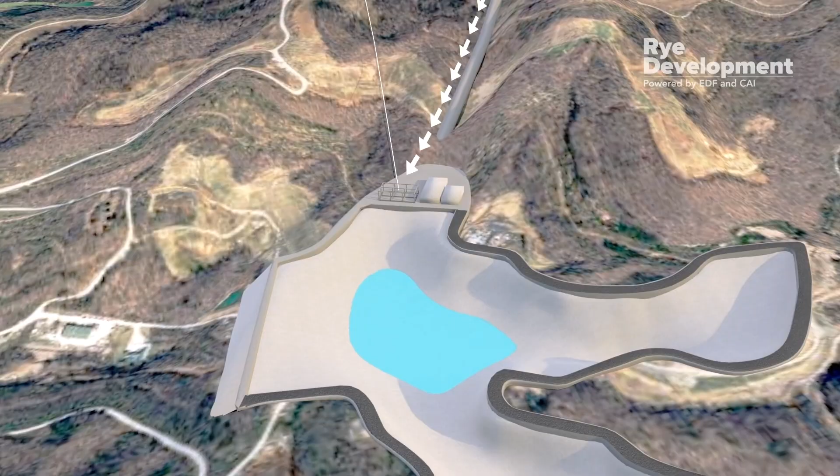It consists of two reservoirs at different elevations. When demand for electricity is low, energy is used to pump water from the lower reservoir to the upper reservoir. Then, when demand for electricity is high, water is released from the upper reservoir through a big pipe or a penstock. As the water flows downhill, it spins hydroelectric turbines at the bottom of the penstock to generate on-demand electricity. The water returns to the lower reservoir where the process starts again.

Pump storage projects are built to last. The first one, built in the U.S. more than 100 years ago, is still in operation today.

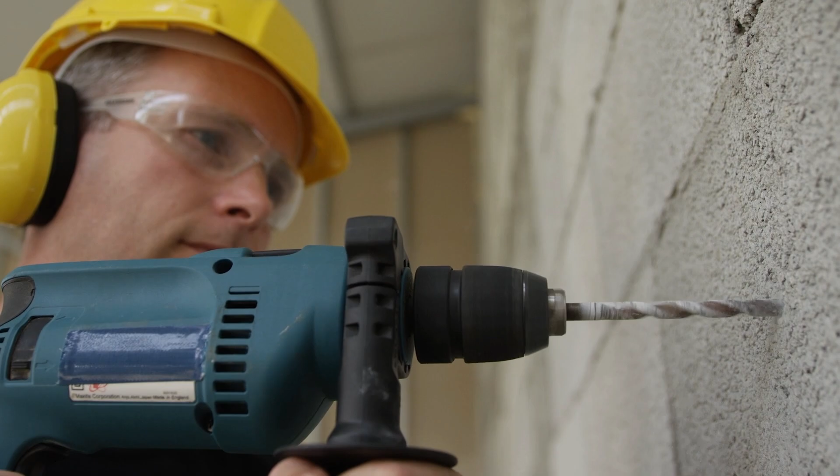Set in Bell County, Kentucky, the Lewis Ridge project represents a new era of jobs and economic growth for southeastern Kentucky. The $1.3 billion energy storage project will bring decades of positive economic benefits to the region. The project will generate more than 2,300 jobs during construction and deliver millions in tax revenue to Bell County once completed. Eastern Kentucky has a strong mining legacy.

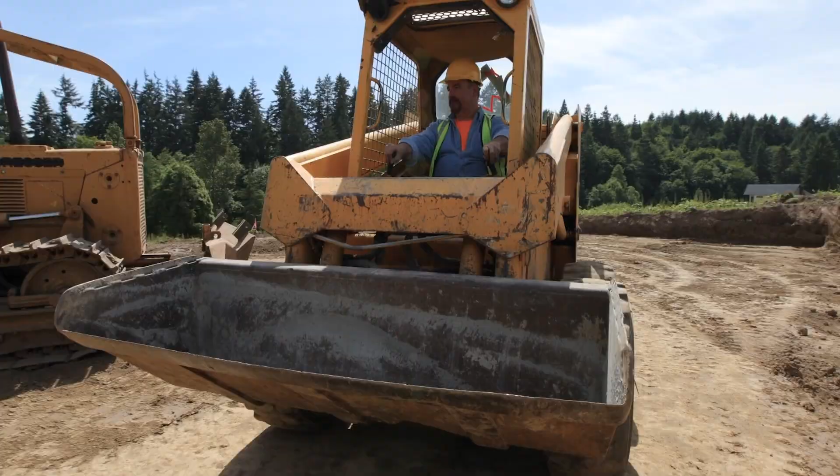Many of the same skills used in mining will be required to build the Lewis Ridge project. We will need workers with skills like operating heavy equipment, drilling, blasting, surveying, and project management.

Asher Land has owned this property 70, 80 years. It's historically been used for coal mining and timber harvesting. Most of the coal has been mined. This project by Rye Development of pump storage would be a great reuse of that property.

The Lewis Ridge project is not only an investment in the electrical grid, but it's a significant investment in Kentucky's future.

Good morning, I'm Bree Wilson, Vice President of Development at Rye Development. And I'm Sandy Slayton, Vice President Environmental at Rye Development. We're here to talk about pump storage, and more specifically, the project that we're developing in Bell County, Kentucky.

We have a slide presentation that's going to start here, but I'll tell you a little bit about Rye Development.

Rye Development is focused on leading us into the next generation of pump storage hydro. We're paving the way - we haven't built a pump storage project in over 30 years in the United States. They are being built internationally, and they're very important in the grid. But this is looking to be the first pump storage project in the U.S., and Kentucky's really leading the way. It's been really great working with folks in Kentucky, and they see that vision.

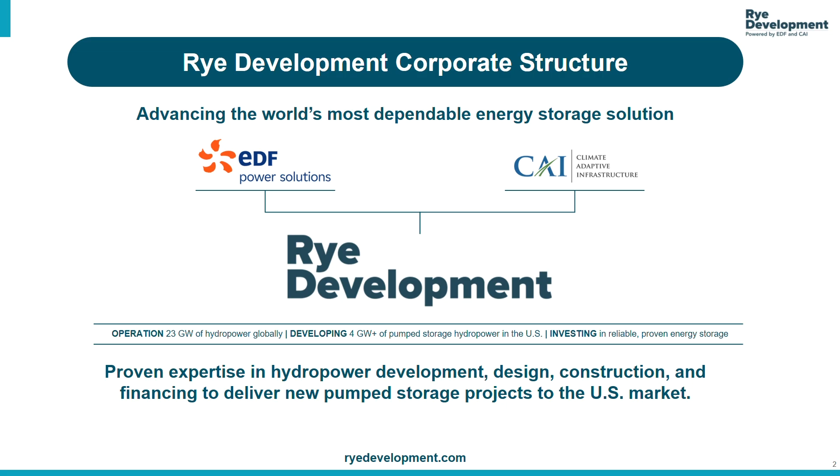This talks a little bit about what we do. The first thing you have to do when you're looking for a pump storage project is figure out if the site's going to work. With your guys' natural topography, it works great because you need about 1,000 feet of elevation, space for 2 reservoirs, and areas close to transmission. You need folks who need the power and folks that can manage it. So there's a lot of great opportunity in Kentucky, especially at the Lewis Ridge site.

We go through from identifying the site to permitting, getting a FERC license, doing the engineering and design, getting the interconnection application in for the interconnection queue, finding folks who want to own and operate, or we could potentially own and operate, all the way through construction, commissioning, and operation.

I'm sure most of you know what pump storage is, but we have to do our little hand gesture for everyone - we joke within Rye about which hand goes on top. Pump storage is long duration storage, so we're looking at 8, 10, 12, up to 24 hours of storage. You have this potential energy in your upper reservoir, so when you need the power, you can just turn it on. Within under 2 minutes, you get power, and it runs down and flows when you need it.

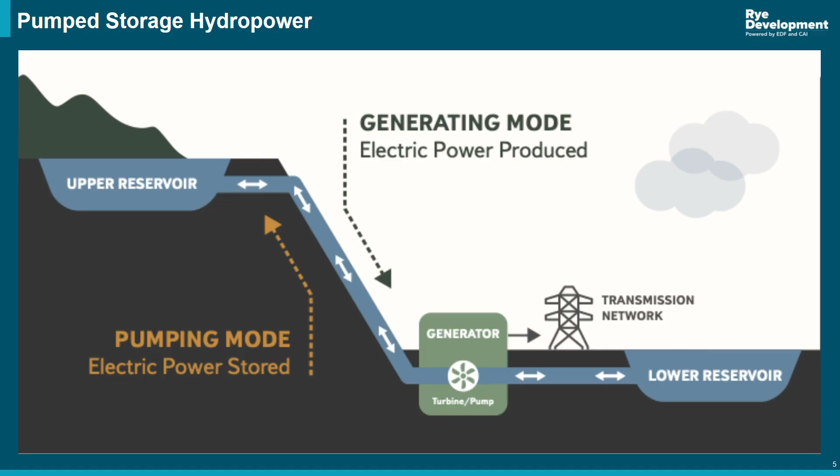And then when you have excess energy on your grid - say your solar comes online, your wind comes online, or you have excess from your base load fossil plants - then you can pump that back up. It's really great because sometimes, in the Northwest, people will pay you to take their energy in those times. So it's an opportunity to operate when you need and pump when you have excess.

One of the things that we hear a lot about is extreme weather. We had an event here 4 years ago, the event in Texas - there's been events across the country where there are large outages. Those typically happen because of the inability to have black start capability, which pump storage does. We also learned about the outage in Portugal and Spain last week at a conference we were at - it was solar and wind, a quick shift happening, and not being able to handle that variation in the grid. What pump storage can do is adjust on demand, basically.

So if you have any energy that you need to put somewhere, you have the ability to do that with your pump storage project very quickly and prevent those outages. And then if you do have an outage, you have this potential energy again that you can just run and have black start capability to get the lights back on.

As you know, there's a large demand in the U.S. We're growing in need because of AI data centers, general need, electrification. We want to bring manufacturing back stateside. There's another big potential growth in need for power.

So we need to keep up with that with all kinds of different solutions, and pump storage really does integrate really well. As we're looking at fossil fuel retirements, what we'd really like to do is help supplement if you have to take a plant off, but also help extend the life of those plants. Nuclear, coal, and big gas turbines work better if they're running at a steady state where they don't have to vary, it extends their life significantly. If you bring a pump storage project in to absorb any shifts, you get to extend the life of those units by years sometimes.

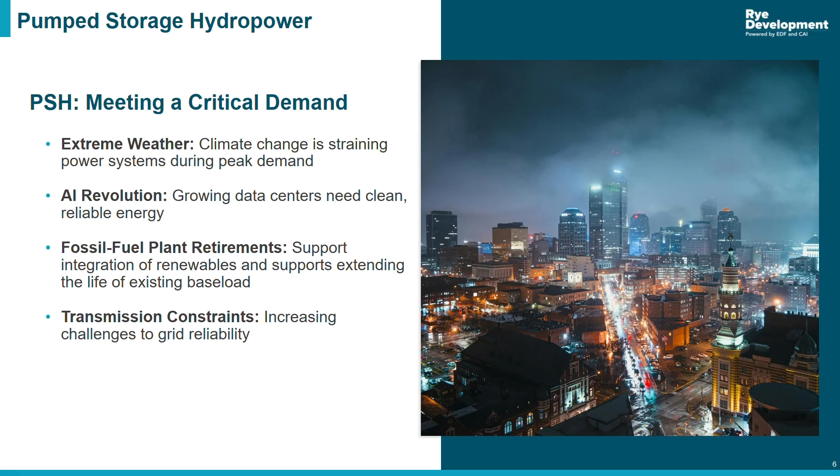Right now, pump storage is 93% of storage in the world. It is the largest, the most reliable. Hydropower projects last 100+ years. We have hydropower plants, with maintenance and some upgrades or rehabilitation, that are going to last hundreds of years. So this is a long-term investment. It's proven. We have it all over, and it's shown that, which is really nice.

So when we say innovative, I think it's innovative to integrate it into the grid, but it really is a proven product, I guess. And then it has low emissions. We're looking to the future and making sure that we're implementing things that are going to push us forward to reduce emissions, and it is one of those solutions.

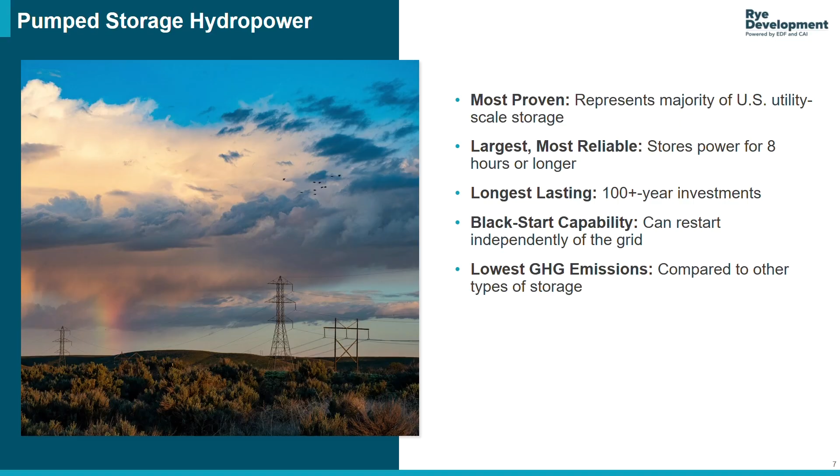So one of the things folks look at is, you need some storage. I don't know how far out you plan—some folks plan 30, 20 years, some folks need a solution within a year or two. They look at cost and when they're going to get paid back, and batteries have typically been implemented. There's definitely a use for batteries, but it's kind of a different product because you're looking at storage for 2 to 4 hours versus storage for 8 to 24 hours. So there's a need for both in our system.

But if you're looking at how this pans out over time, it is a lower cost long term. You wouldn't have to continually replace batteries—after, I think it's a 15 to 20 year replacement. I'm not an expert on batteries, so I shouldn't say anything.

But we have supply chain independence. You build it and you have water—that's what you're using. You're taking the water and you're pumping it through.

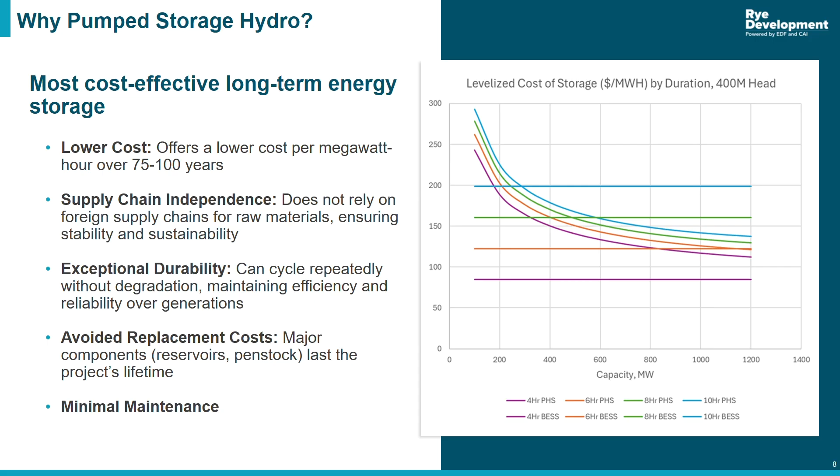The maintenance on a project is something that you would do now. We'll be looking towards more predictive maintenance instead of time-based maintenance, so the industry is shifting a little bit that way too. I don't want to get into that, that'd be a whole spiel on a different thing, but the maintenance on these is not extreme.

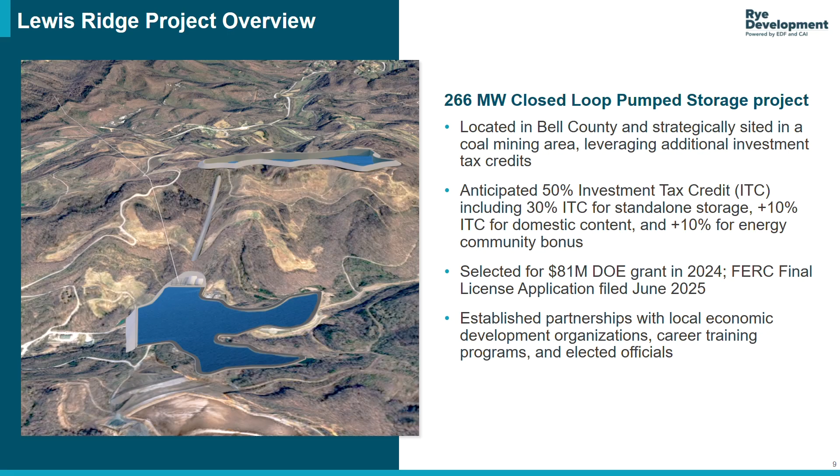We're working on career training programs and hopefully getting the message out to everyone who we can possibly talk to about how we envision this project benefiting Bell County and southeastern Kentucky, and how we can continue to collaborate to make it the best it can be for eastern Kentucky.

So the project is a $1.3 billion investment in southeastern Kentucky, which is big. Over 2,300 family wage jobs will be required for the 4-year construction period. When you think about Bell County, that sounds like an incredible number of people. We're talking about up to 700 individuals on site at any given time. So not 2,300 at one point, but 700 at any time, and 2,300 over the course of the 4-year period.

And then another 40 plus permanent jobs after the project is operational, and those are long-term, family wage jobs.

The other fact that's really an impressive number, and I think makes a really big impact, is that our annual tax liability for the project will be $16.5 million. We at least have estimated that during operations, and if you compare that to Bell County's current annual budget of $13 million, it's a pretty big benefit to the local economy.

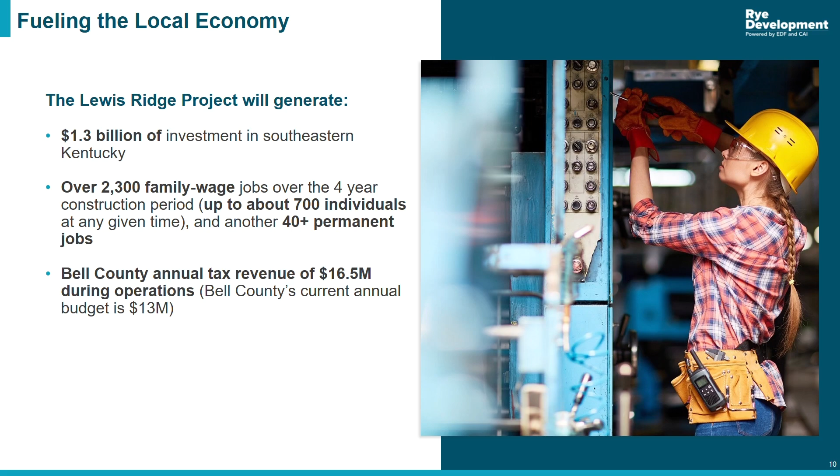We were thrilled to be able to receive an $81 million cost share from Department of Energy for the Clean Energy on Mine Lands program. We were awarded this in 2024. The total award is $81 million. Phase one of that award is $24 million. Well, sorry, the total project cost in phase one is $24 million. The award itself is $12 million, so half of that amount.

That phase one work includes all the things we're talking about now: budgeting, scheduling, and early engineering work, permitting work, field work, and then workforce planning, and all of the things that it takes to get a project launched. That's about an 18-month timeline that should end around the end of the year, and we'll move into phase two. But the phase two activities are largely similar to what we're doing now in phase one.

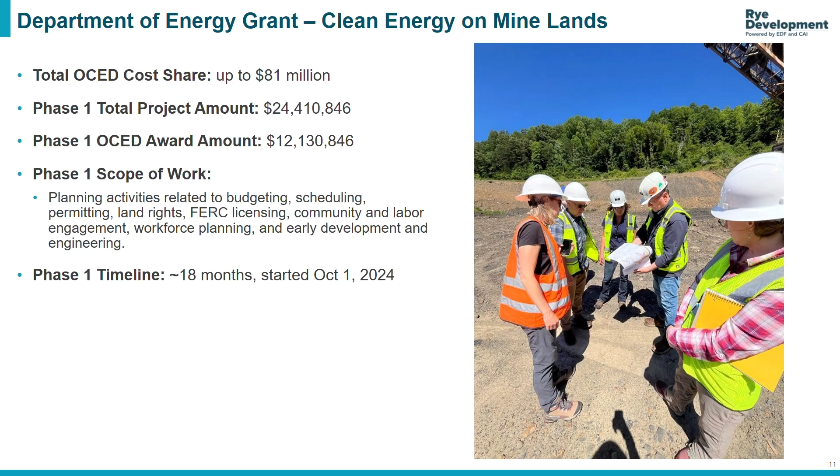So this timeline is potentially not as interesting as it actually is to us, because one of the challenges with getting pumped storage online in the US, and one of the reasons we haven't had a project developed in so long, is that it's a really, really lengthy permitting process. It's expensive, permitting takes forever, and it's complicated because you have to bring all these things together. So one of the reasons we think Rye has been innovative is that we've been able to compress our timeline, which will allow the project to come on faster.

But when you're looking at something that's 15 years out, it's hard to plan for a project that's 15 years away. So we've compressed the timeline into something that's a lot more reasonable, which allows utilities to plan, allows investors to plan, and allows the local communities to plan and really see what this will look like.

So we started this whole process in 2022. We got a preliminary permit from FERC, which basically says, okay, you can look at developing a project. And then we filed a pre-application document with FERC, which is basically a library report of all of the information that's publicly available on the site to describe the environment the project will be developed in, and something similar to a draft of our project engineering, where we think the project is going to be on the landscape. From there, we had a public meeting in January of 2023, got a lot of people together, got a lot of really great comments and conversations going, and developed some really great relationships with folks we'll be interacting with for a variety of different reasons on the project.

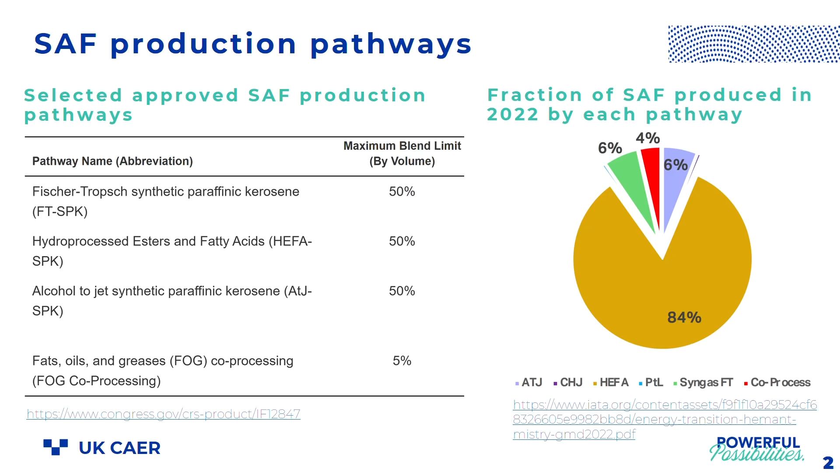Yes, it worked. I'm struggling with the...

The feedstocks are related to the production pathway that they are employing. For instance, Fischer-Tropsch requires syngas, which is a mixture of carbon monoxide and hydrogen, that can be produced through gasification from coal, biomass, natural gas, you name it. FOG, or fats, oils, and greases, not only can be used by HEFA, but could also be used by other methods, such as co-processing. In co-processing, 5% of FOG is mixed with a fossil stream and upgraded to SAF in a conventional refinery.

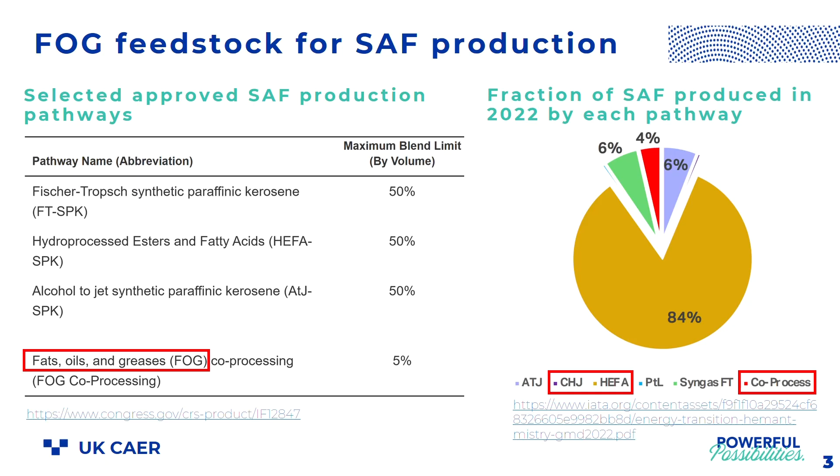Most of the technologies to produce SAF are based on FOG, and therefore our study focused on these feedstocks. We focused on 4 representative feedstocks: 2 are waste streams, used cooking oil or yellow grease and brown grease. But we also focused on 2 other feedstocks, namely soybean oil and corn oil. These are one of the most important agricultural commodities in the state.

Just to put things into perspective, as a function of SAF production, projected 2030 jet fuel usage in Kentucky will be 1.2 billion gallons. And the Kentucky SAF Coalition has set up a goal for, in the same year, 2030, for usage to be 10%. That's 120 million gallons. And therefore, Kentucky's FOG production can help reach this goal using HEFA technology.

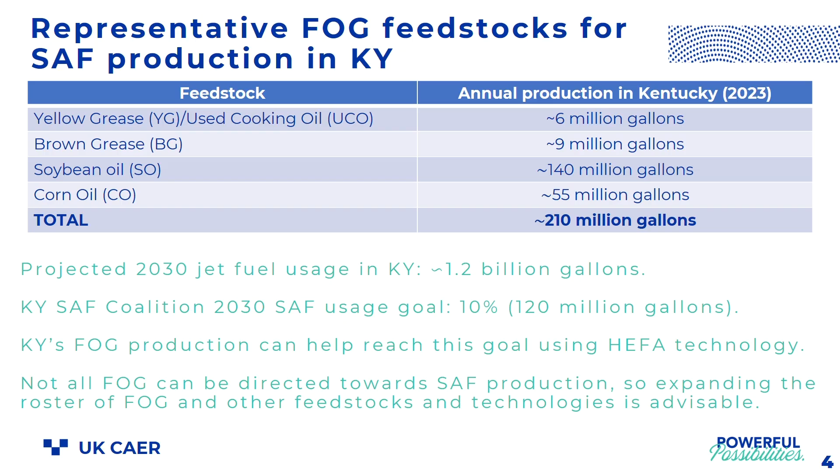Now, not all FOG can be directed to SAF production. We do eat a lot of this stuff, which also has other uses. And so that highlights the need to expand the roster of FOG and other feedstocks to produce SAF through HEFA and other technologies. We performed this risk assessment based on the U.S. Department of Energy framework for biomass supply chain risk standards. This is a framework developed by DOE to inform investment and de-risk folks that are interested in expanding the whole potential of the bioeconomy. So we looked at 6 different risk categories.

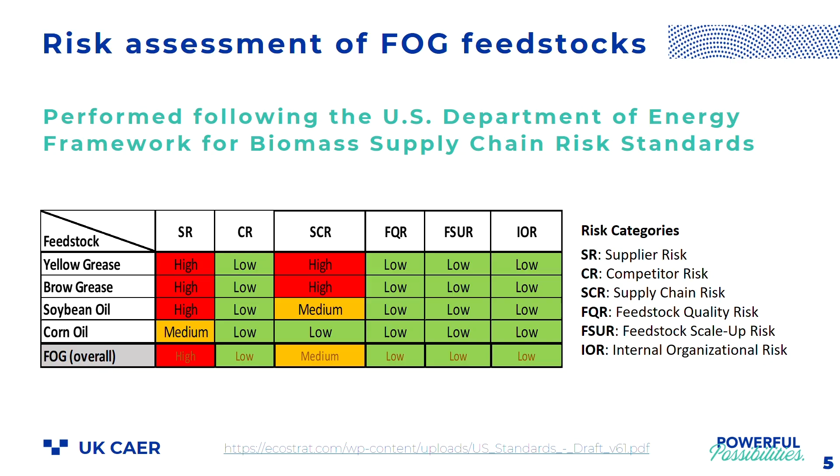But for corn oil, supplier risk was medium and supply chain risk was low, making corn oil the lowest risk feedstock overall. Now, this project also had a GIS component, which we'll hear more about later on. For this particular project, we wanted to determine how much of this feedstock is available and where it is located. One of the most interesting findings is that the highest density for production of these feedstocks is in close proximity to the Ohio River.

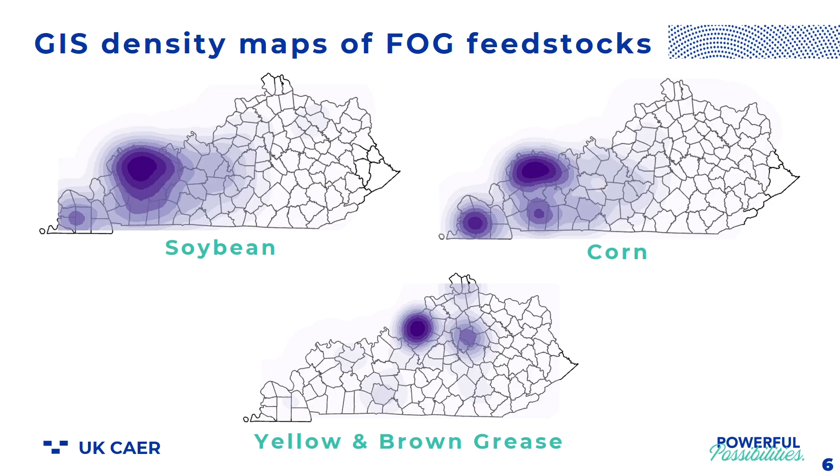This creates a pretty interesting opportunity because Kentucky's two largest airports are also located in close proximity to the river. So one could envision locating a SAF production facility nearby, allowing for feedstock to be transported to that facility, and for SAF to be distributed back to the airports using this waterway, allowing for efficiencies. With that, I'd like to thank once again the Cabinet for funding this work, and you for your kind attention.

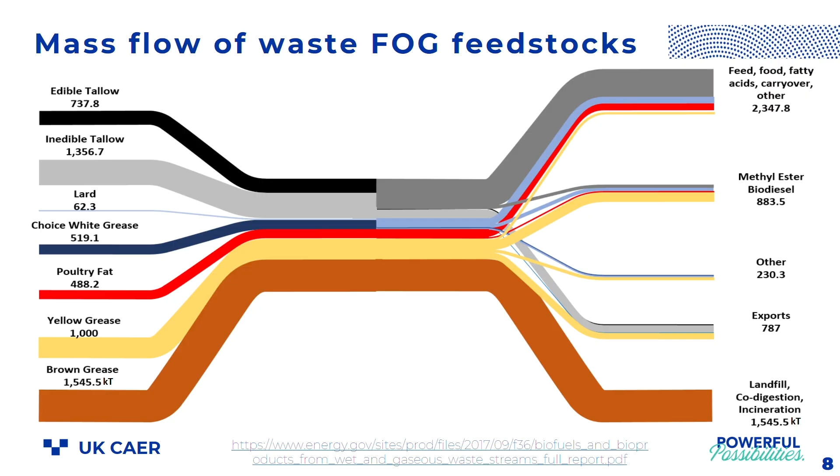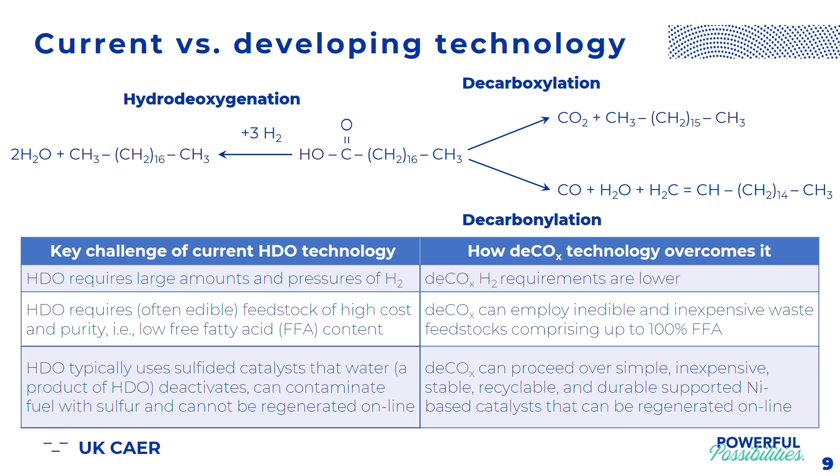Haley mentioned that we focus on renewable diesel and sustainable aviation fuel. Hopefully I won't give anybody nausea when I show this chemistry - you can just look away from the chemical equations, don't mean to send you back to bad memories of college. Suffice it to say that most hydrotreating technology currently is based on the hydrodeoxygenation reaction, which has several disadvantages. We focus on other reactions. In the table on the slide, you can see the drawbacks from current technology that we're trying to address through alternative technology. That's the take-home message.

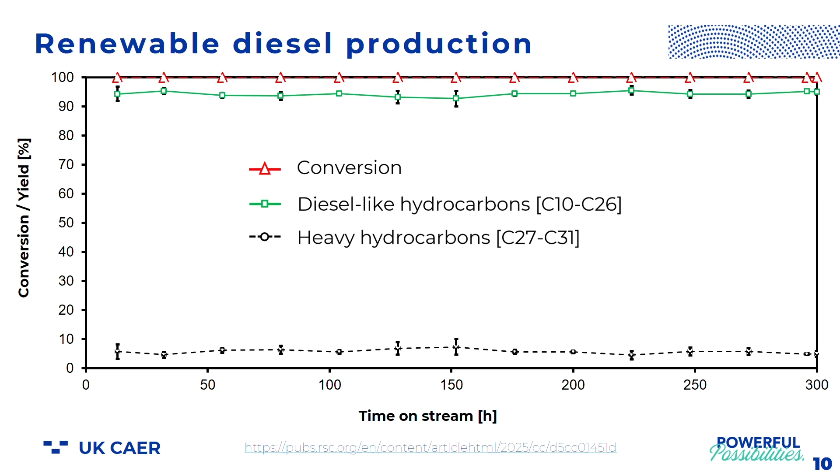When it comes to renewable diesel, we have used brown grease to produce renewable diesel at 100% conversion from brown grease, and 93% plus selectivity to diesel-like hydrocarbons. We've done so through hundreds of hours on stream. This is work funded by the US Department of Energy, and it proves that our technology can be tested for a long period of time to give these very promising results.

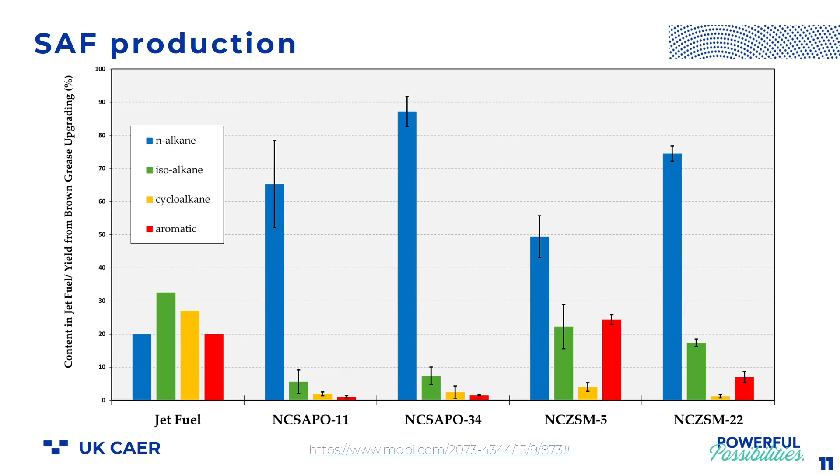Awesome, thank you so much, Eduardo. Eduardo did mention the Kentucky SAF Coalition. This is a partnership of airlines, air cargo carriers, fuel producers, industry, and more. They've come together to explore how Kentucky can play a leading role in the future of sustainable aviation fuel, and they have funded WSP to look more into this and see where Kentucky stands today and where we can go in the future. I'm excited to have Auden here to tell us a little bit more about their study and their work with the Kentucky SAF Coalition.

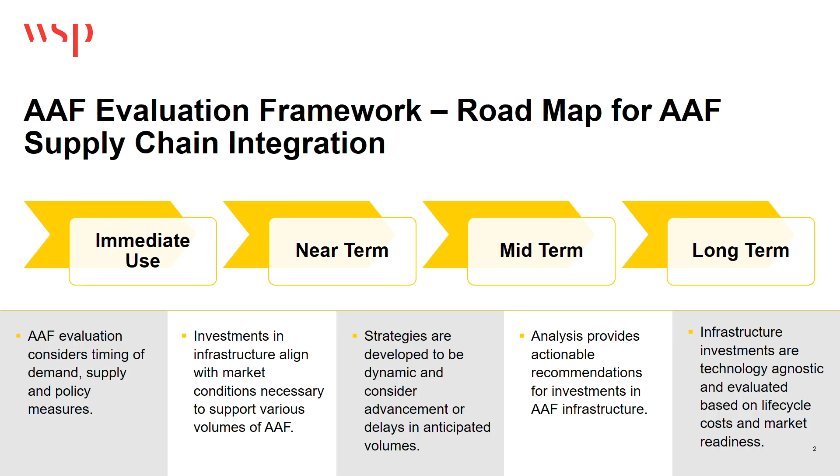I'm going to be using the term alternative aviation fuel interchangeably with SAF. We're using a more technology agnostic term here compared to Eduardo, who is focused on specific technologies, but essentially it's the same term. I don't want to confuse you too much on the jargon, so I'll keep it simple and use alternative fuels for this presentation.

There are a lot of different scenarios in how we can bring alternative fuel to the state and what percentage blends are possible, both from a technology perspective and based on what's available from a supply and economic perspective. A lot of our work is really focused on the policies, both at the federal level and the state level, to help encourage the use of sustainable aviation fuel.

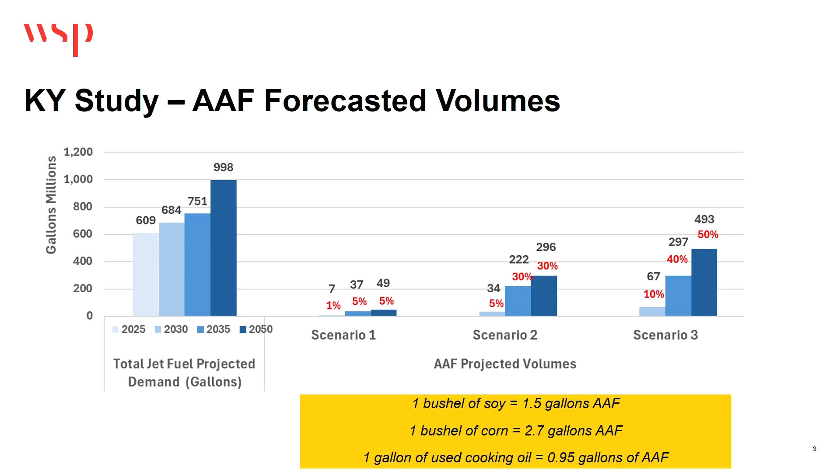So for blends, looking at 2025, a 1% blend would be about 7 million gallons, up to a 50% blend in 2050 of close to 493 million gallons. That sounds like big volumes, but to put it in perspective - a bushel of soy can produce roughly the equivalent of 1.5 gallons of alternative fuel, corn about 2.7 gallons, and if we're looking at used cooking oil or other byproducts and waste products, we're almost at a 1-to-1 ratio.

Kentucky has a very interesting position as far as conventional jet fuel and refined product supply - in general it's largely disconnected from the major refining centers in the Gulf Coast and East Coast, with definite constraints on connectivity to major pipelines. Most of the supply tends to come from two primary sources: the Marathon-Catlettsburg refinery located on the Ohio River, and the Lima refinery in Ohio, which has a small diameter pipeline that feeds into Cincinnati. But overall, most product moves by barge down the Ohio River, as Eduardo mentioned, with some inter-movements by truck - so we see a lot of barge to terminal to truck to airports.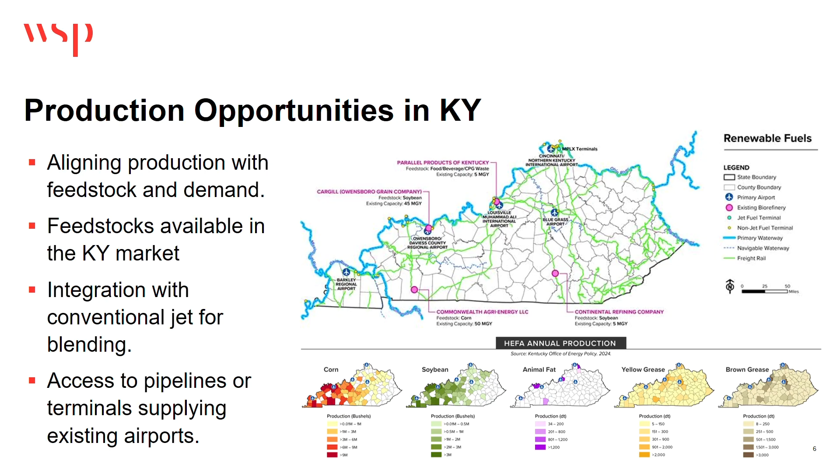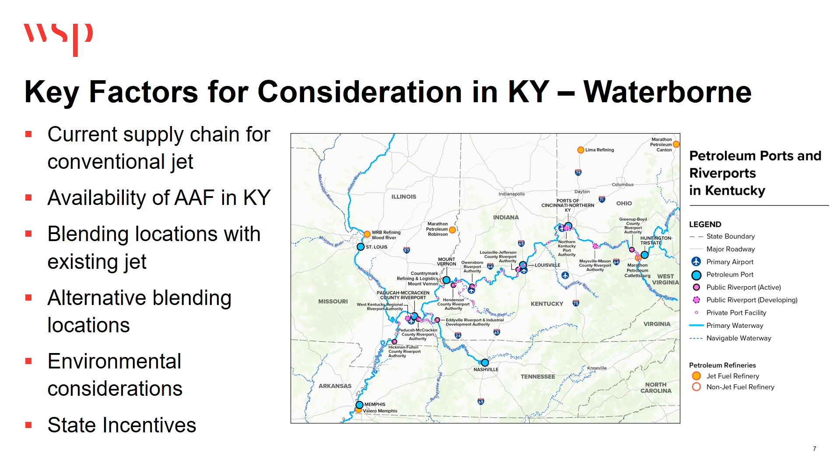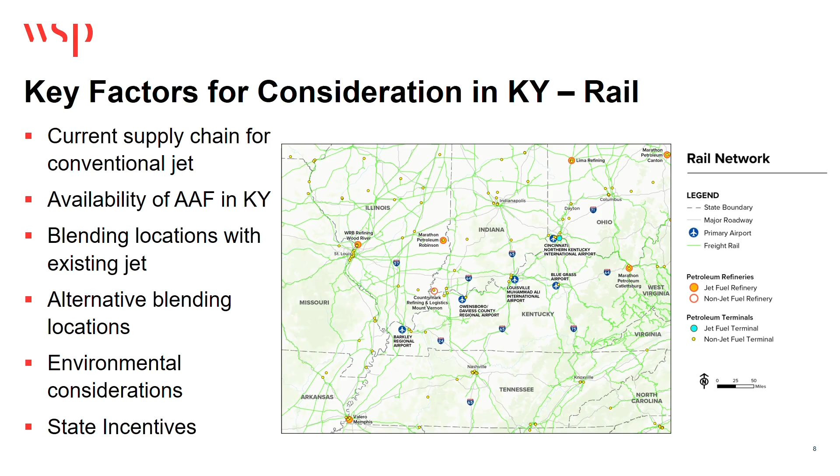When we look at Kentucky, in addition to some of those waterborne movements, you can see there's synergies with the Mississippi River as well, so some opportunities maybe in the future to export both feedstocks and potentially production from the state to other markets. But really, it's all integrated along that river system and also supplemented by a really developed and built out rail system. This serves as a great pathway for moving a lot of the feedstocks and produced products. Most of the ethanol and biodiesel today is moved by rail.

Now, getting into the primary components here is policies and incentives. So I'm going to start with federal and then get into state.

There's been over $4 billion in federal funding to support research, development, and production, including alternative fuel-specific production, specifically the FAST SAF grant program, which brought in $300 million over 33 projects, just focused on SAF production.

We also have the Federal Renewable Fuel Standard. That has been the primary federal program supporting all biofuels for the last few decades, and really been pushed to extend to alternative fuels for aviation.

And finally, the IRA 45Z. This is kind of a transition from the 40B program, for any of you familiar with these incentives. But while it reduced the amount available for SAF from $1.75 maximum to $1, it did extend the timeline from 2027 to 2029.

And this is critical for investors. They need to see that these incentives will be in place for longer term to support these investments in alternative fuel production. So we're really optimistic that given the bipartisan nature in today's environment in DC, that it was able to get through with that support.

At the state level, it's really a hodgepodge of activities and incentives. Most of the original backing for alternative fuels was the West Coast. You have low carbon fuel standards in California, Oregon, Washington, that really supported some of the initial growth of production for alternative fuels. That's expanded, and now we're seeing a lot more interest in tax incentives or tax credits.

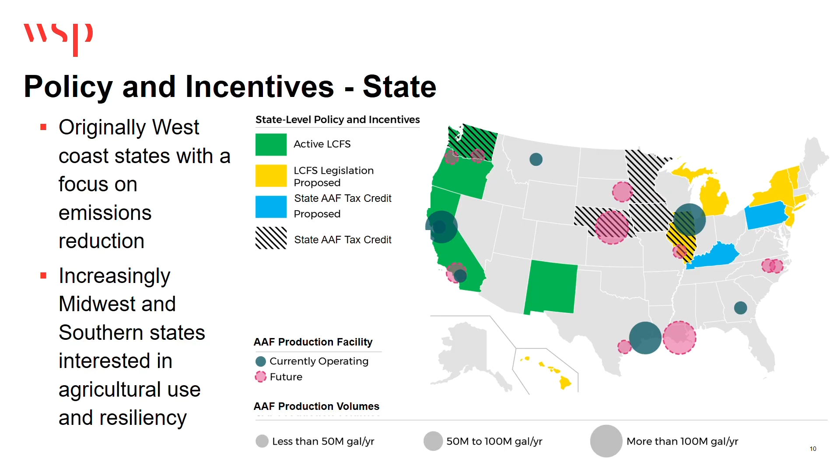These tax credits, as you can see on the map, in Minnesota, Nebraska, Illinois, and potentially soon Iowa, are looking at different pathways and looking at essentially the production within the state rather than the use and reduction necessarily in emissions. The policy incentives really focus on that combination of production and blending incentives.

So we've seen, again, those tax credits in Minnesota, Washington, Nebraska, and Iowa, really promoting domestic production and refining of alternative fuels.

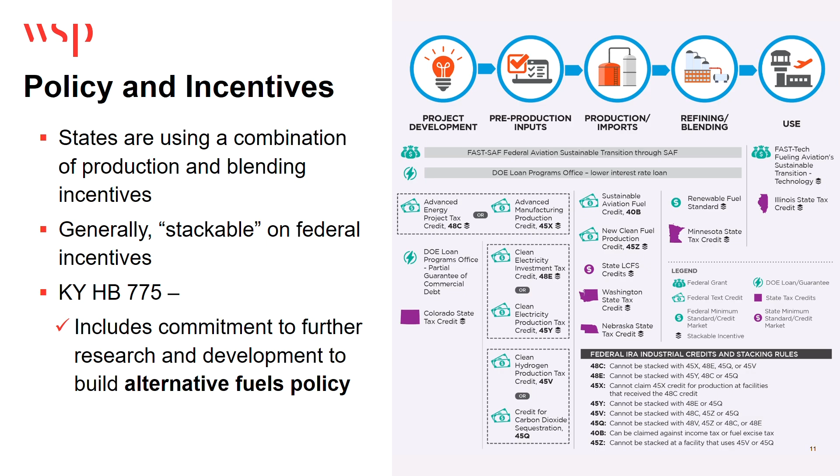They're also stackable, and this is important when we look at the pricing, that you can stack both federal and state incentives to diminish that gap or variance between the price of conventional jet and the price of alternative aviation fuel. Kentucky House Bill 775 did commit to further research and development to really continue that work and build up that alternative fuels policy.

So what does this look like in practice? This is an example of some infrastructure and supply chain investments that we're looking at. We evaluated over 50 terminals and tanks throughout the state, and also some greenfield sites where there's potential for building new facilities. These can range from $5 million tank conversion expansion to $85 million investment in new sites and infrastructure.

Specifically water and rail. So a lot of incentives to build and develop these facilities, but also utilize facilities that might not be maximized today. So a lot of maybe half-used or underutilized storage facilities where there really is an opportunity to both store and blend alternative fuel with conventional fuel.

And as Eduardo mentioned, there are restrictions on how much you can blend that we're looking to tie to when we look at these investments.

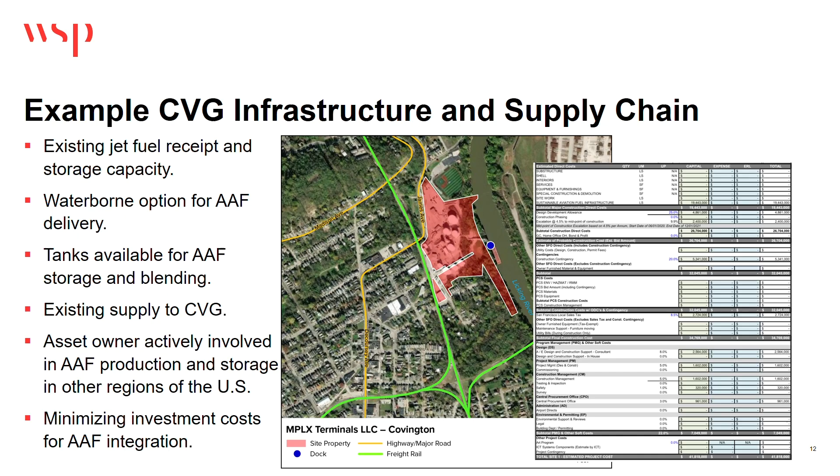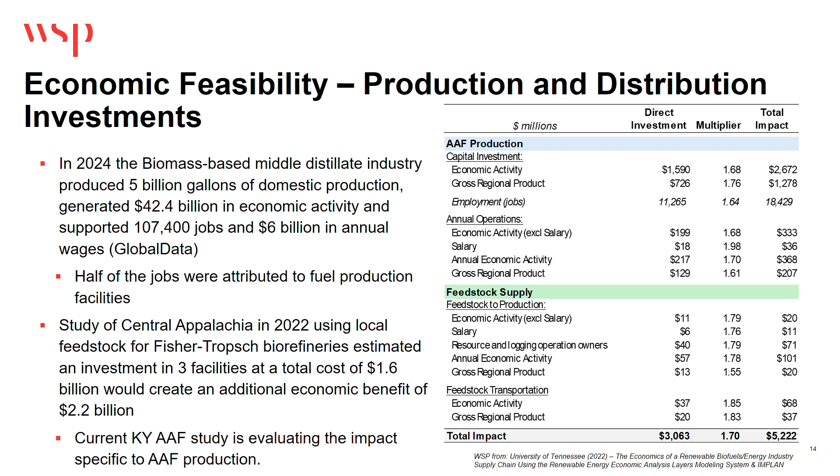But really, at the end of the day, Kentucky is looking like a great opportunity for investment in sustainable aviation fuels. Yeah, thank you so much, Alden.

So just last month, the One World Alliance, representing 15 airlines in the world, launched a SAF investment fund focusing on developing and commercializing sustainable aviation fuel. And like Alden said, SAF is in limited supply, and that's contributing to higher costs, but demand is continuing to rise, and Kentucky is well positioned to play a role.

However, Kentucky isn't just home to traditional biofuel waste streams — we're actually home to a pretty interesting one, and that is stillage, the byproduct of the distilling industry, which has led Kentucky to have a really interesting opportunity. And Grisson, based in Scotland, has invested for the first time in the U.S. and is now calling Kentucky home, so we're really excited to have Matt Yarger on our panel today to talk about this investment and about Grisson Renewable.

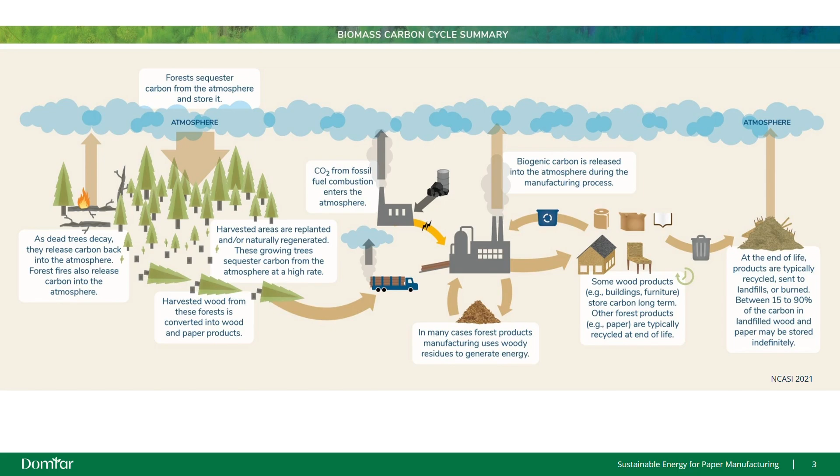This diagram shows the big picture. Trees take in CO2. We use wood to make pulp and paper. We recover byproducts and use them as renewable fuels. Some of the CO2 we emit, we're able to capture and sequester into our product. This process starts and ends with sustainable forestry. Over the next few slides, I'll walk you through each step in more detail.

The two renewable fuels we use are black liquor and scrap wood. Black liquor is a byproduct of the pulping process and contains lignin, a sticky, gooey polymer that naturally binds wood fibers together, and spent cooking chemicals. Instead of being wasted, we concentrate black liquor and burn it in our recovery boilers. This produces steam for the mill and recycles cooking chemicals back into our process.

Scrap wood includes bark, trimmings from the lumber industry, and wood chips not suitable for pulping. When we burn scrap wood, it produces additional steam for the mill and ensures minimal waste from our feedstocks. Purchasing scrap wood is a financial benefit to our lumber mills and chip suppliers, as otherwise they would have to dispose of this product as waste. Together, these two fuels form the backbone of our energy production program.

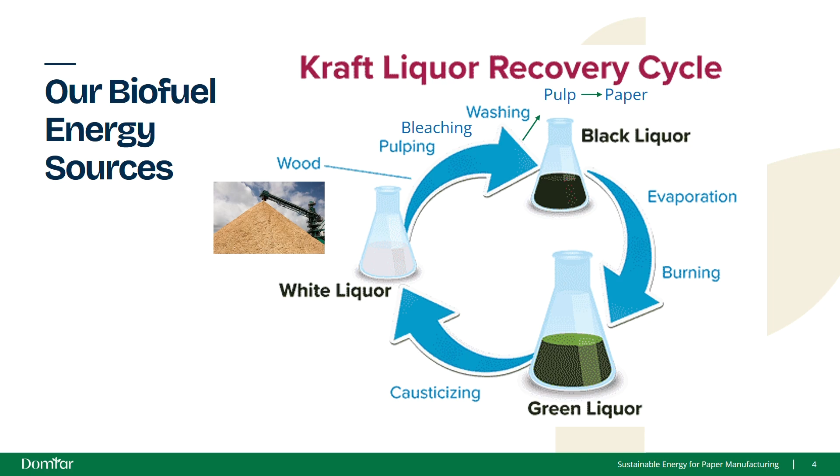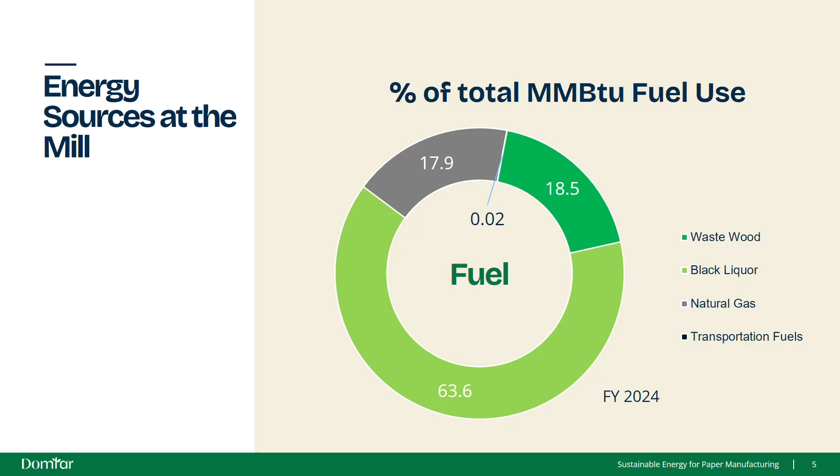Our boilers produce high pressure steam, which is sent to a power turbine to generate electricity. We currently generate about 50% of the electricity we use on site. Steam exiting the turbine is usable low pressure steam, which is sent to various processes in the mill and to the paper machines for heating and drying.

When we use these fuels, this cogeneration setup for both process steam and electricity is more efficient than having separate systems.

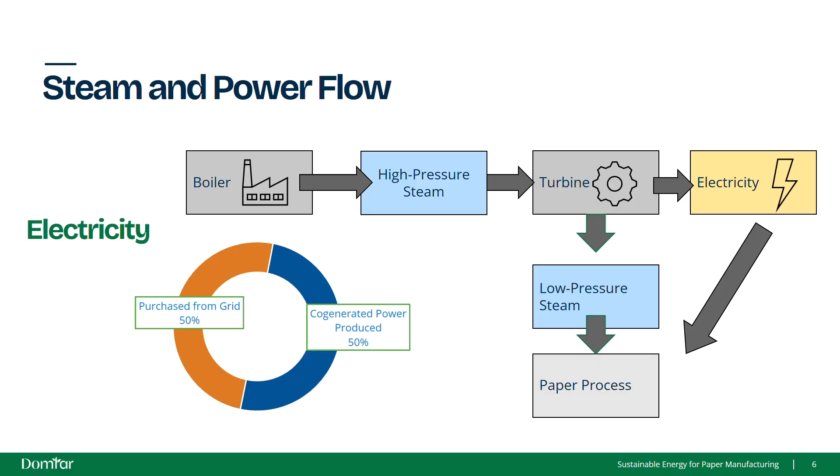Another unique part of the Kraft paper mill, and also our mill, is CO2 from our lime kiln is used in the production of precipitated calcium carbonate, or PCC. PCC is a filler ingredient for paper that improves brightness and print quality. So essentially, we're locking CO2 from our process into the paper itself.

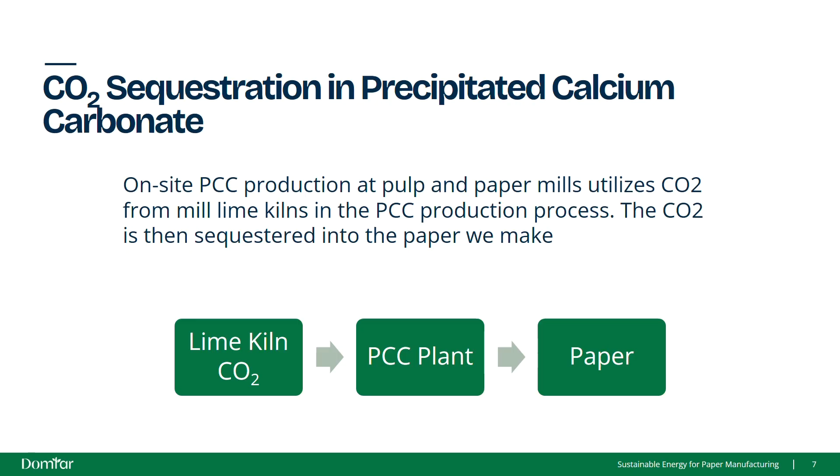Benefits of using renewable fuels are both environmental and economic. Environmentally, using black liquor and scrap wood reduces our need for fossil fuels. These fuels are also considered biogenic because they're part of the natural carbon cycle. And plus, being able to capture CO2 from our lime kiln and store it in PCC and then the paper itself is very good from a sustainability standpoint.

On the economic and operational side, using renewable fuels saves us costs. We're not having to purchase additional natural gas or electricity. We're using the products we already have to generate those. Also, in the Kraft pulping cycle, the recovery boilers are able to recycle these pulping chemicals over and over again, reducing our need to buy virgin feedstocks.

So overall, using renewable fuels has led to lower costs, self-sufficiency, and better efficiency.

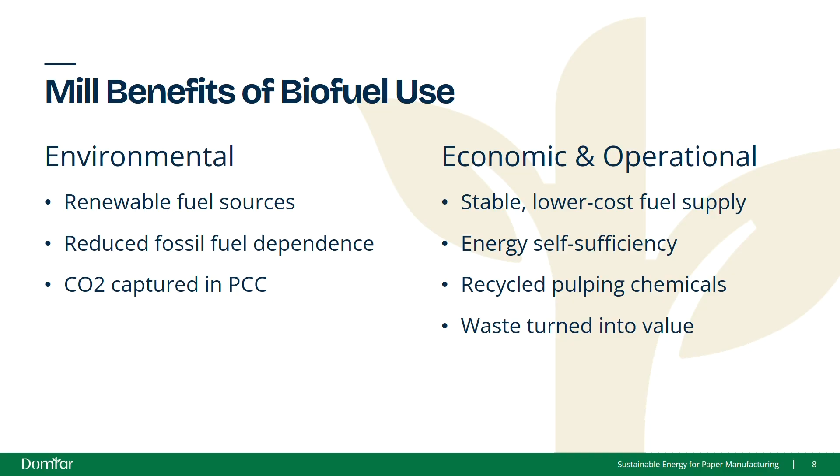Like I said, Domtar has really been a leader in environmental stewardship in the paper milling industry, and that starts well before generation. I'd love to ask you if you could tell us a little bit more about your forest management practices and how they tie into your overall environmental stewardship goals.

Sure. On the pulp and paper side, we primarily buy wood, but we do manage some forest in the US and Canada. First of all, we have to be really respectful to the communities. A lot of these communities in Canada especially were traditionally home to many indigenous people, so we have to be respectful of that. All of the forests that we manage are third-party certified to several international standards, and all the wood that comes into all of Domtar's mills is traced, tracked, and third-party certified.